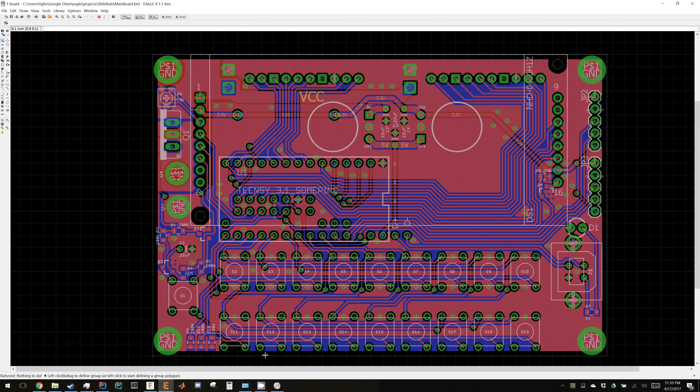What else do we have? Eagle updated, gave me all these fancy little labels on all my traces, so that's nice. My nets and stuff have labels now. What else? So the majority of the work I did was in Fusion. I can show you in the CAD.

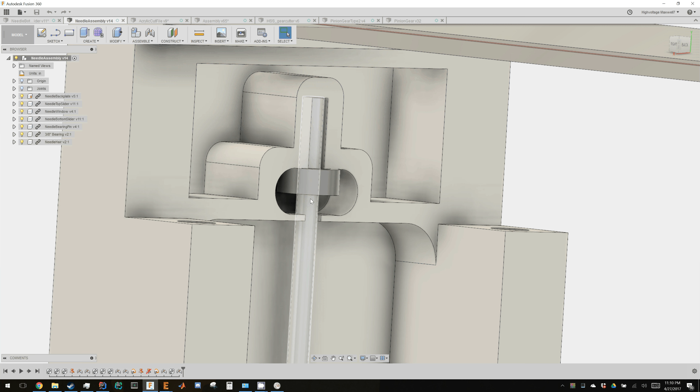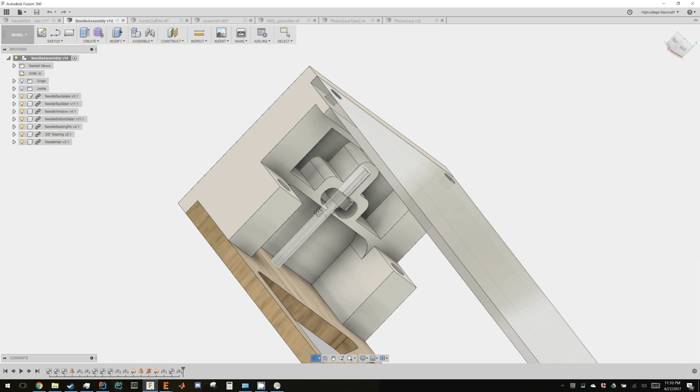So I printed out this bottom block here on a 3D printer finally. Got this axle cut to length because I got a 1/8 ground axle from McMaster. I had to cut it to length, and also had to chuck it up in the hand drill and put some sandpaper on the end, and remove a little bit of material from it because it was a little bit bigger than 1/8 and didn't fit this little tiny bearing. Not sure why the bearing's all the way up, like asymmetrical on that, but whatever. So I had to do that, and then what else did I have to do? That was about it for that.

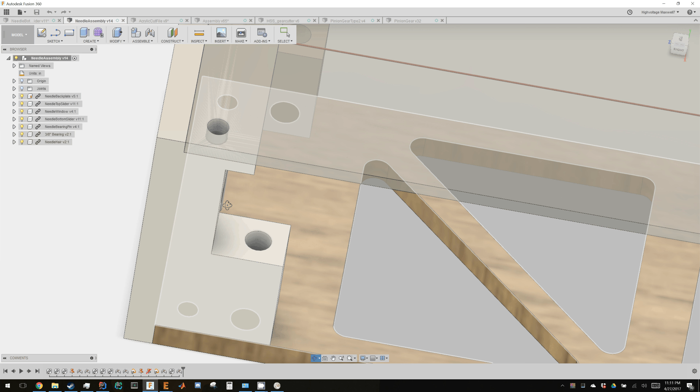I also did a lot of post processing on this 3D printed part - I had to tap it and drill this out so it's the right diameter. Finally figured out the trick to machining PLA: go really slow, retardedly slow, just make sure heat does not build up. As soon as heat builds up, your part is screwed - it just melts on you, there's nothing you can do. But if you don't, then it works fine.

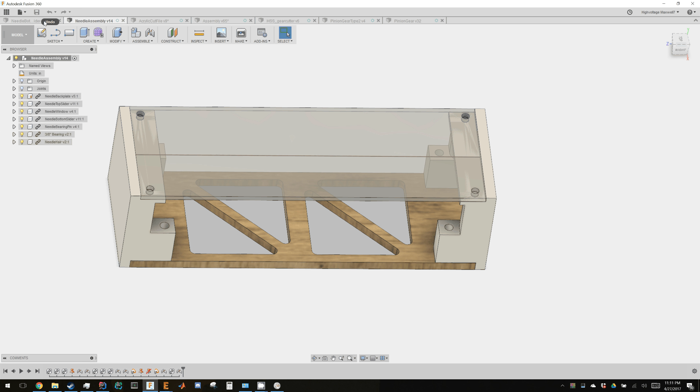So that's nice. What else did I work on? So that is the needle part. On the full assembly over here, it kind of slides around. What else did I work on?

So I got all the faceplate stuff ready to be cut, all the acrylic thingies. So if that file would open in a moment, you can see I got all the cam work done for it - got what segments, curves I wanted to run the laser cutter past.

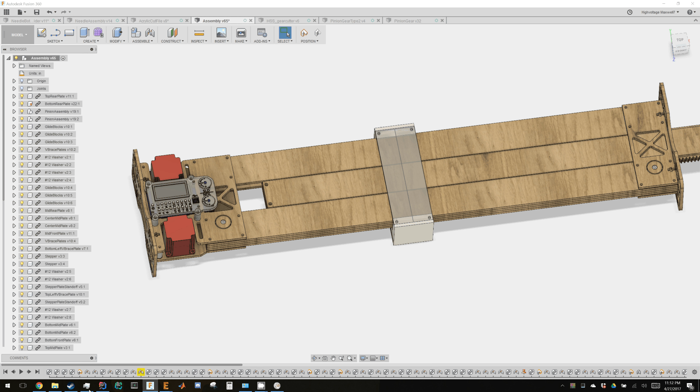Why is it not opening? Oh my god, lord, I think my CPU is throttling down again. It's been doing that on and off. Why, show me the magic? Yeah, it's throttling down, it's retarded. So if I go to the acrylic cut file, go to open my setups, do simulate, get rid of stocks, I don't want stock. Go - oh lord, it's throttling down again. Why you throttle down? Go shaft. No, go holder head. And then I run this.

Not all my parts are on the same plane, so if there's a little offset, it doesn't matter really. The cam doesn't care. So if I start the simulation, yeah, you can see it's running, doing all the decals.

Let's speed this up a little bit. Doing all the decals first, because you don't want to cut the decals after you cut the outsides, because that makes the part fall out, and then it upsets the part off the rest of the reference material, and then you deal with offsets and stuff.

Now it's doing all the actual cutting curves, so it's actually cutting through now. The earlier pass was just etching, and now it's done. I was narrating a little slow for this thing, but whatever.

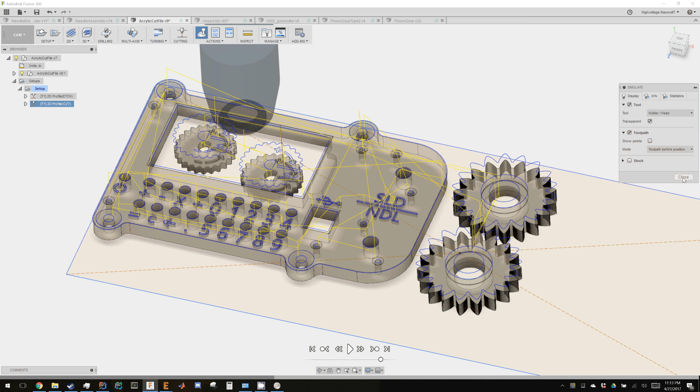So that's that. We'll close that. We will close. There you go. Close simulation. So that's that.

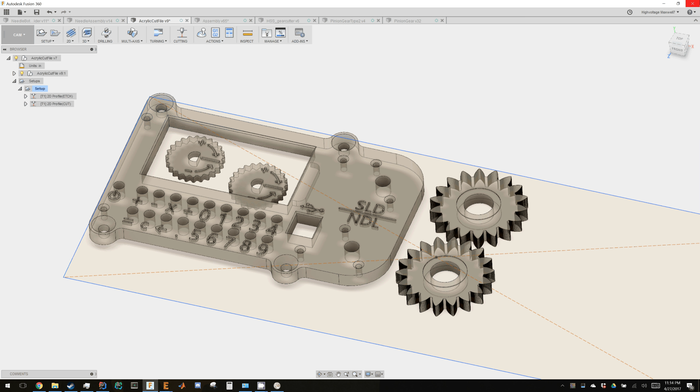One thing I figured out was the pinion gears for the slider, for the big slide. Because 3D printing sucks and I hate it, you can't do any post-processing with it, I had to come up with a different method of making the big pinion gears. So instead of 3D printing them, the original thought was... well, I'll get to that in a moment. I just 3D printed this, came out terrible, I hate it. I need to come up with a better way.

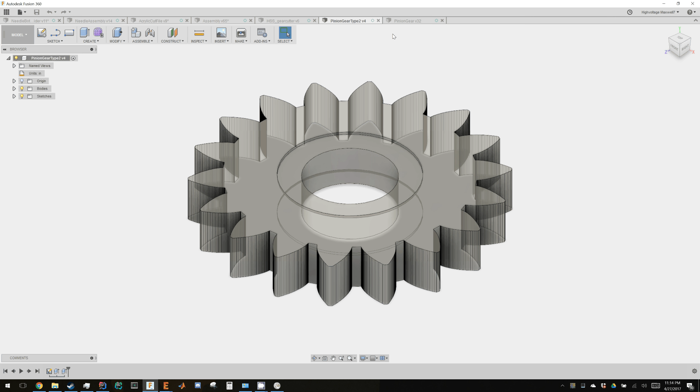What I'm thinking is I'll make the gear, cut it out of acrylic on a laser cutter, because it's a nice hard material, a nice plastic that'll give me a nice finish. But cut it on a laser cutter, and then I'll press it onto an aluminum axle. So I end up, and I can just turn that axle to the dimensions I need. So it'll end up kind of like that. I can totally do that, and that should work.

So I was messing around with various CAM stuff for Fusion. This was originally designed to be cut with a gear cutter out of a round, like 2-inch Delrin round stock. Once I had the teeth cut into that round, I would just use a lathe to get rid of all the extra material I didn't want.

So I'd have an axle here and an axle there on a lathe. But that would require a custom cutter and an indexing head and all that jazz. And I don't just have a machine shop at my disposal, because robotics is anal about me using theirs, because I'm a programmer, not a machinist apparently.

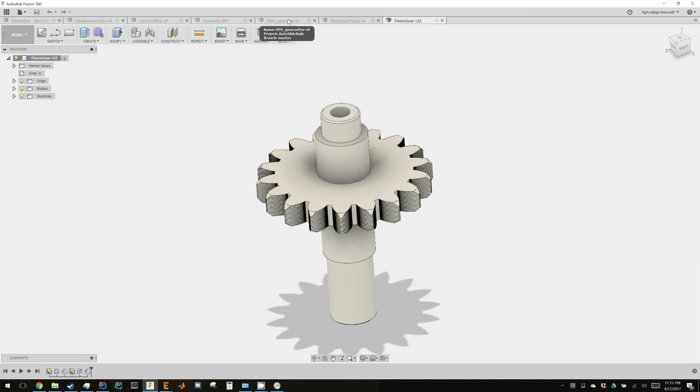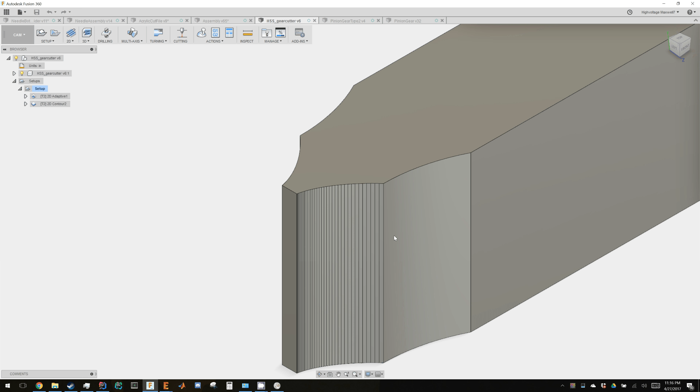But anyways, digressing. So I was just kind of tinkering with the CAM software. I made the gear cutter that would be required to do that operation, and I have no intention of actually doing that operation. I really think I should go a different route, because this is going to be a lot of steps and kind of a pain to actually do.

But I messed around with the CAM software and made a little CAM toolpath. I'll show the stock transparent, no. Go over here, go holder, go flute, and we'll run it. You can see I just did a couple adaptive passes to get rid of most of the material.

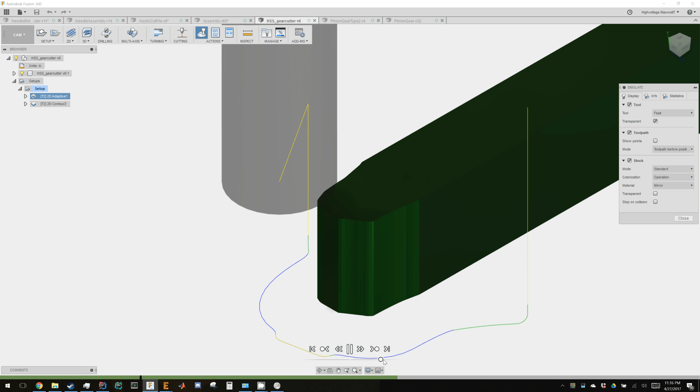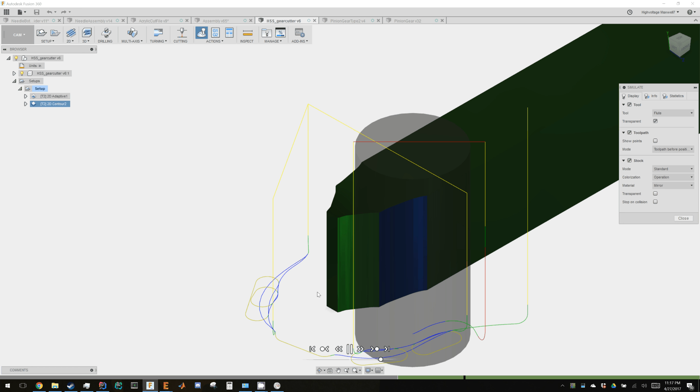Fairly slow, just because it's high-speed steel, so you don't want to run into the thing. It's just removing a little material in each pass, touching it occasionally, getting rid of material here and there. It does a couple little spirals around to cut it all, climb milling, then it drops down and does a 2D contour to finish up and bring it to size, then one more 2D contour to account for tool deflection and get rid of that last little bit that stays on because of things like tool deflection.

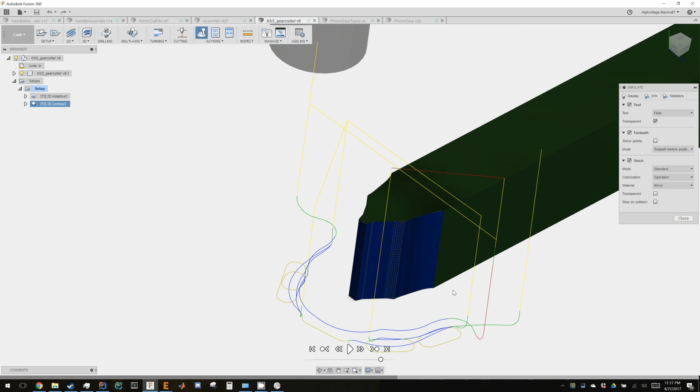So that's that. That came out kind of neatly, and I like that. It's just designed to cut into a high-speed steel blank. So I closed that, and while I was at it, I was tinkering with the cam for that slider block over here, because that was also originally designed to be cut on a mill. This one would have been easier just out of a giant chunk of Delrin, like a block.

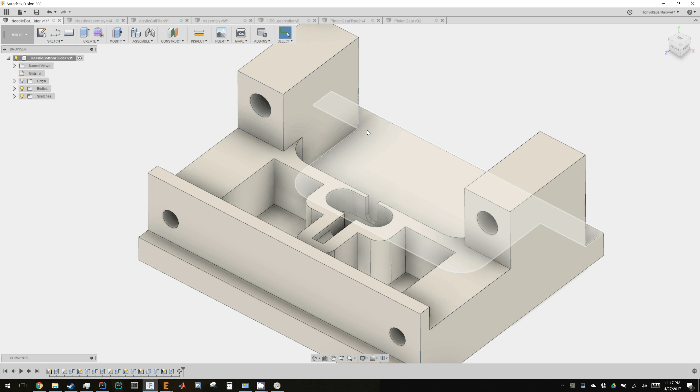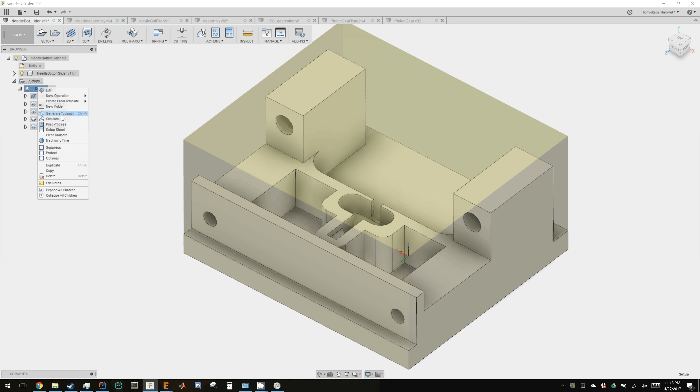And then what I would do, this is all fairly easy to do. You could even do it manually on a CNC mill, but it would be a pain. There's a lot of dimensions you need to do, but it would probably be easy with the DRO. Anyway, I decided I wanted to tinker with the cam for it, so I did that. I go to cam, go to setups, go simulate, and I'll run this.

You can see I'm just using a big 1-inch end mill to do the majority of the operations, just because I can. A lot of the important operations at least can be done with just a giant 1-inch end mill, so that's what I'm using. Doing a couple pocket operations to get rid of a lot of the material here.

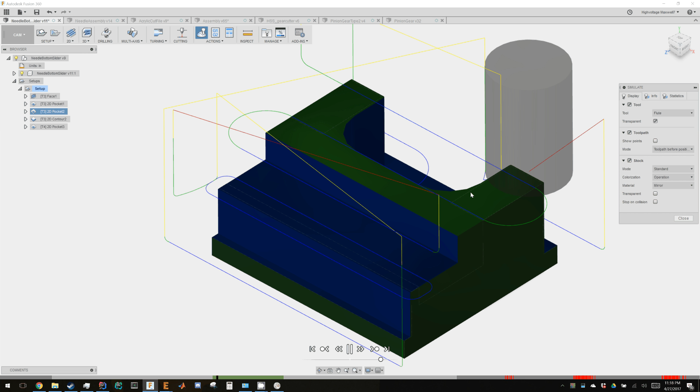I don't care too much. I don't think I'll run into any issues about crashing the machine trying to take those really deep cuts. If so, I'll just reduce the feed rate to deal with that.

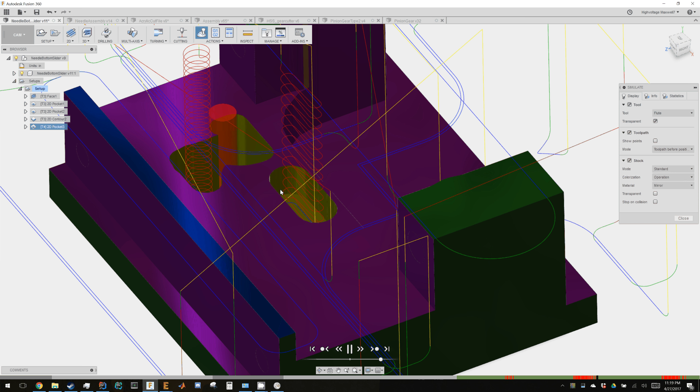And then here I'm doing little helixes down to get those little pockets machined out. It complains that I run into the corners with the tool holder, which is because it's not long enough - that's why it's turning red. But yeah, it's doing a little 2D pocket to open that up.

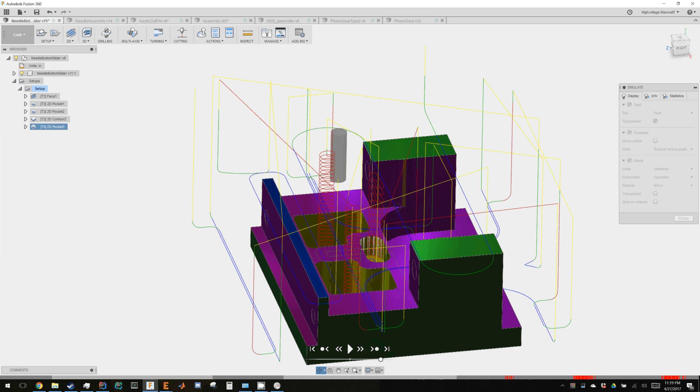I'm not sure why the helix starts way up here. Best I could tell, there's no good way to deal with that other than just let it do it and ignore that it takes forever to helix down. The examples I've seen that deal with situations kind of like this do the same thing - I didn't see any way to avoid this.

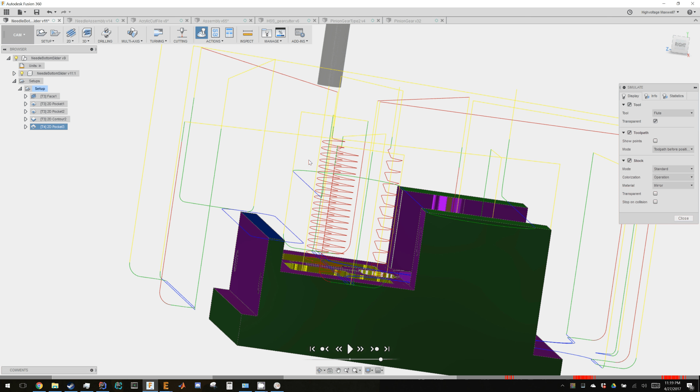The issue is that it starts where the top of the stock starts - it starts helixing assuming that this is what it originally started as, which is a giant Delrin block. But there's not actually material here, so there's no need to spiral. I don't know why it's trying to spiral. It's kind of weird, don't know quite how to deal with that.

So maybe a different setup. I'm not sure, honestly. I only used the CAM software to do a couple things, the two things I just showed you, so I'm still learning.

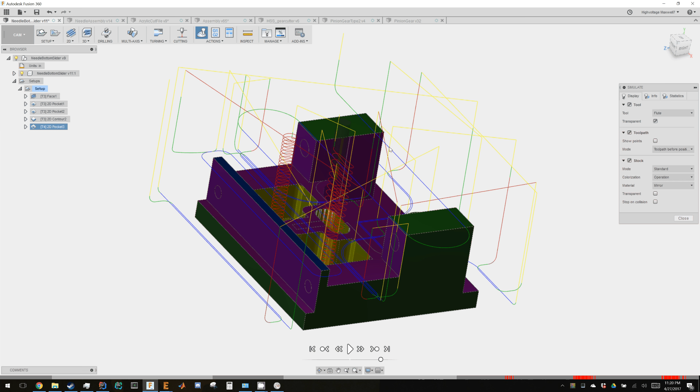That's give or take about all the things I worked on so far this progress report. I think I might be forgetting something. So just a lot of assorted things - BOM, trying to hunt down laser cutters, just not the most fun stuff. Doing this cam was pretty fun, but BOM is kind of meh, printing stuff out is kind of meh.

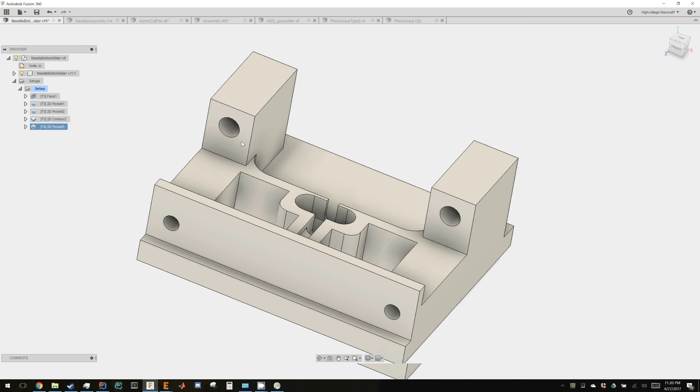I also improved, did a little bit more CAD work on the belts, the idler belt pulleys. Kind of mathematically solved how much this spacer, this standoff, needs to be to hold the bearing from this plate to where the thingy needs to be. That could be wrong.

I need to go to sleep. Anyways,

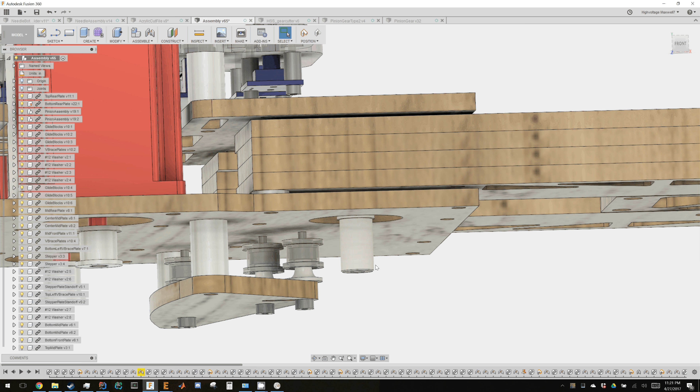But yeah, so that could be wrong. I don't want to say I doubt it, but I don't know, could be. Just need to kind of tinker with that, make sure it's something reasonable and makes sense. And it looks, honestly, it looks like it makes sense from here at least.

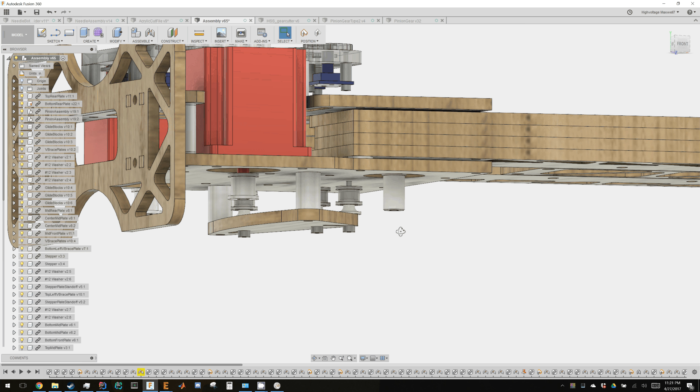Yeah, the main pulleys give or take is lined up. I can adjust where I put this pulley anyways, just adjusting the set screw. But other than that, not a whole lot - like I said, CADed the idlers, CADed the standoff, made a little assembly for that. Just this and that.